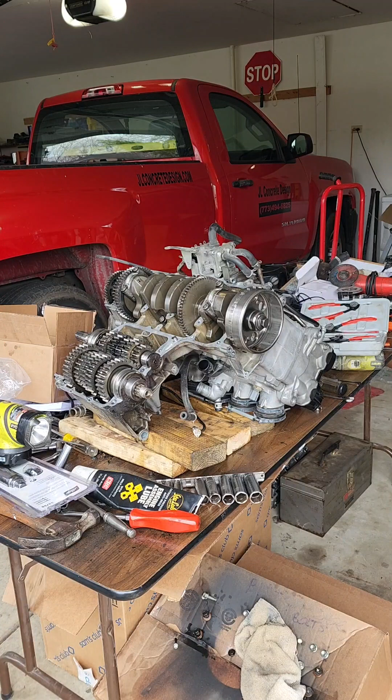I ordered some parts, main bearings. I didn't like the look of the main bearings. They were still usable, but since the engine's open, I just replaced them.

I had one very damaged shift fork. This is the second gear shift fork. See how badly worn it is.

My guess is a lot of these drag, track, whatever people reverse the shift order. They flip the shifter upside down so it's 1 up and 5 down, so they can bang those gears quicker. To me, that's exactly what it looks like.

This is the second gear shifter fork, so you're putting a lot of force as you're pushing down on that lever, and it's just eating away at this fork. The gears look good, but the fork was just worn out pretty badly.

This one fork was $105 new. I wouldn't trust buying a used one. It's a wearable item, so I just said to heck with it and bought a new one. So $105 there, and then here are all the main bearings.

They sell, I don't know why they do this, but they sell the main bearings in halves. So you got to buy 2 of these to get a whole main bearing, times 5, of course. So you need 10 of these.

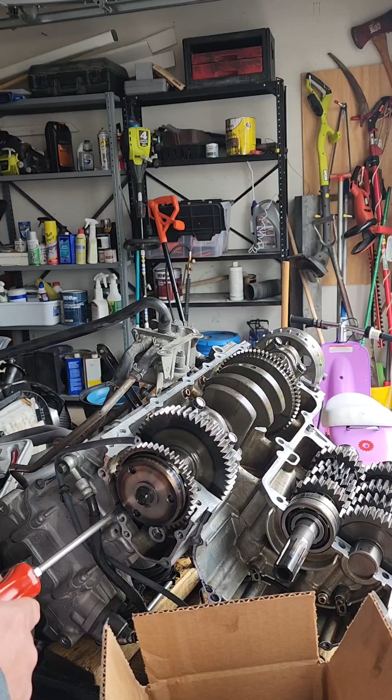So all I did to replace the main bearing on this first one was kind of pry up a little. Don't get aggressive, just pry up a little bit, push a little bit, and it'll tension the cam chain a little more so it lifts the main, and you can pick at this bearing and it'll slide right out.

I did remove the connecting rod caps on all 4 of them, loosened them up, so you can get a little more wiggle room out of the crank to replace the bearings easier. But I did it without removing any of the timing chain, and it's all in time, so that was pretty simple.

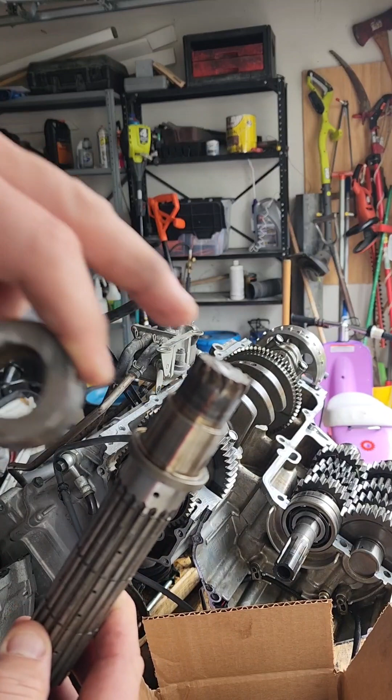And of course, the output shaft. This was the output shaft that was in it, you can see that - I'm off camera here. This is the output shaft that was in it, it literally sheared right off. This sits here, and then the bearing sits here.

It has to be pressed off. The rest of this is just gears, shims, and 3 snap rings, so you need a set of snap ring pliers, and that's it - that's your specialty tool there. 3 snap rings, and then the rest of the gears just literally pop off with the spacers.

You know, if you got a good memory, go for it. I don't, so I got the manual here to make sure where all the gears and spacers went.

You do need a press, though. You're not going to be able to get this off the bearing and this bushing without a press. Go pick up a Harbor Freight 12-ton, you can buy them cheap, $100. Or I'm using my Harbor Freight 20-ton, I think I paid $200 for it. So it's a very useful tool. Or you can just bring it to a shop and they'll press it off for you if you don't have a press.

But I'm curious to know what force did that, and I really didn't get an explanation from the owner. He just said his son drove the bike and he was popping wheelies and the chain broke, and I guess it got wedged into the case and just sheared the edge of it off because it got jammed and it couldn't spin anymore. But you know the story with sellers, they'll bullshit you till the end comes near. I never listened to them, so my guess is he probably overheated this a little bit, and that popping of the clutch, and you know the rest of the story there.

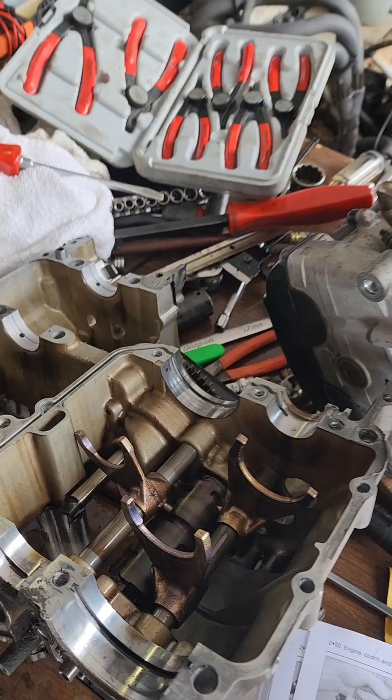Here is the fork I replaced. $107 later for one fork - these Hayabusa parts are not cheap. And then I think I found the output shaft locally, nice guy, I bought it on eBay and picked it up locally, and that was $75 just for the output shaft. Everybody wants $500 plus just for the whole transmission.

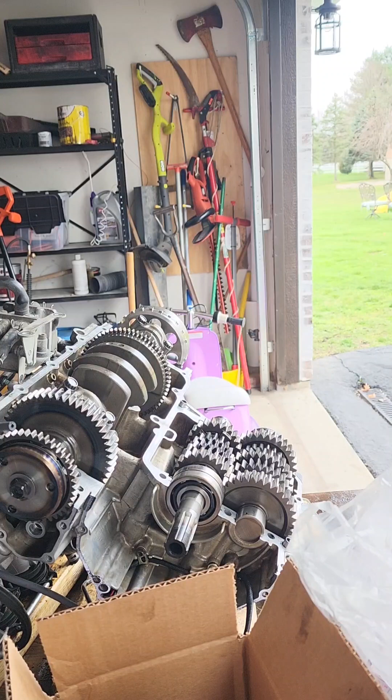So I managed to fix the transmission for $75 output shaft and the $105 or $107 fork. And then the $150 was just cheap insurance for the main bearings. So we're going to get ready to put this thing back together, and let's get it going here. I'm running out of time to get this thing on market to sell.

All right, next on the list is cleaning it up. I'm going to clean up everything here, the surface, and then I got to put the sealer, the RTV, on the mating surface here, and then I'm going to add more assembly lube to the mains and to the bearings in the transmission, because they've been sitting. I had to clean them with hot water, warm water, and I just WD-40'd them, which is literally like water anyway. So I want to make sure those don't start up dry.

Okay, let me look at the manual and see where this RTV is going here. I'll bore you with the searching, and then we'll get more in depth when we yank that other engine. I may take that other engine all the way apart, just so you guys can see what it looks like all apart. There's plenty of videos on Hayabusas taken apart, so I figured I have this spare motor, I'll go into it and see what's wrong with it, fix it, and sell it, because when this engine is in the Hayabusa and I sell the Hayabusa, I'm gonna have more money than it's actually worth in used condition. So the other motor, I'm gonna have to sell to make a profit on this bike, because I paid way too much. All right, sit tight while I do some search, and we'll see where the RTV needs to go.

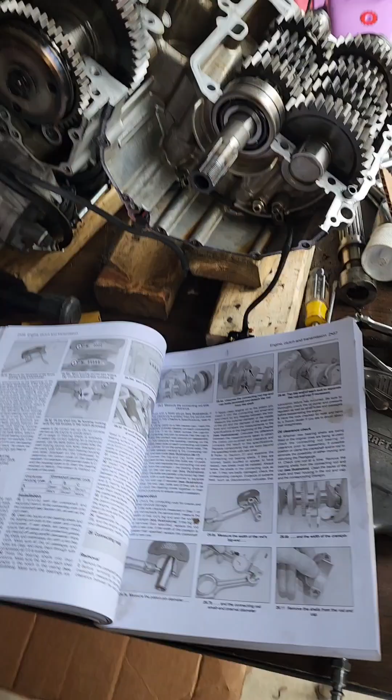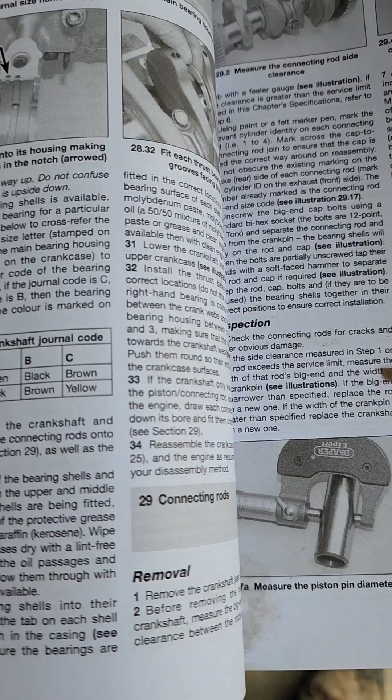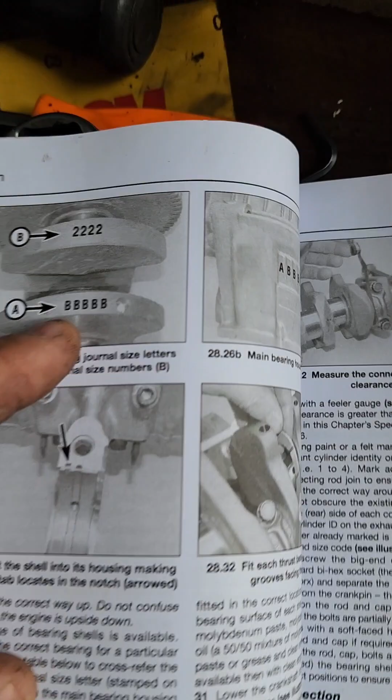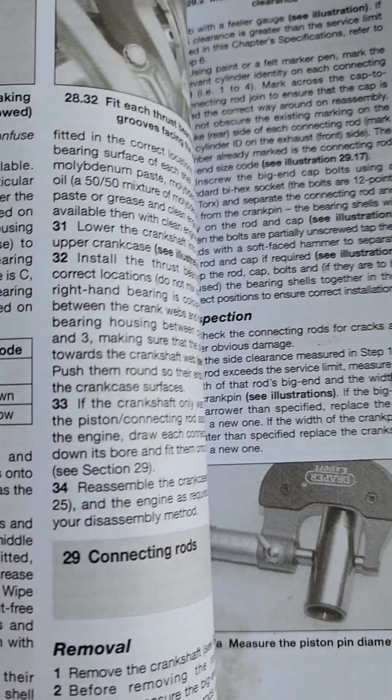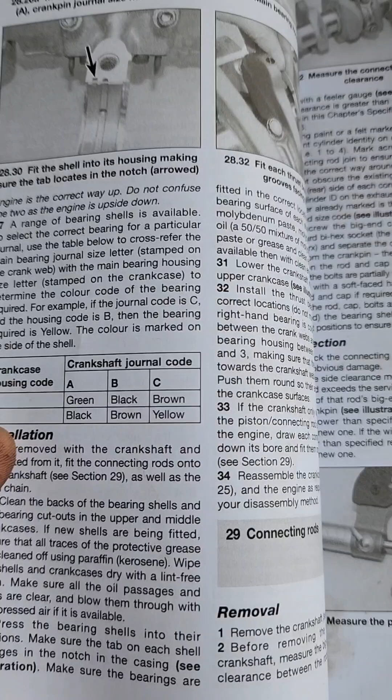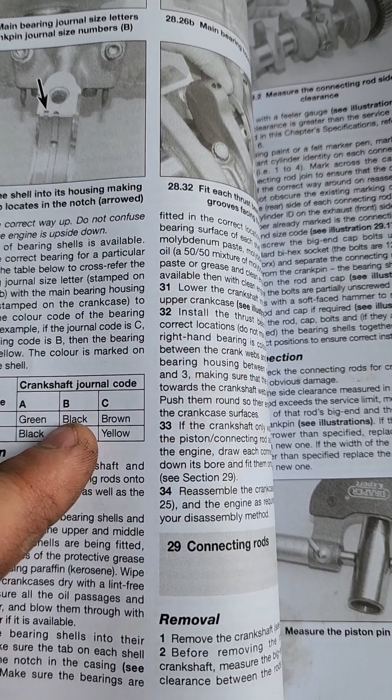So 4 A's and all B's, that was 4 black coated main bearings, and then I had the all B's and the 1B on the housing itself, the upper housing. Then one bearing I ordered was brown color coded. So I had 4 black and 1 brown, and that's how you determine your main bearings for that particular case.

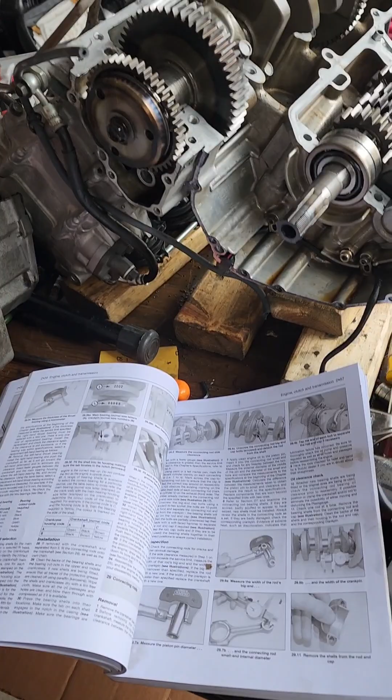Okay, I just thought I'd show that to you guys, and let me continue looking for the RTV side, where the RTV goes on this thing.

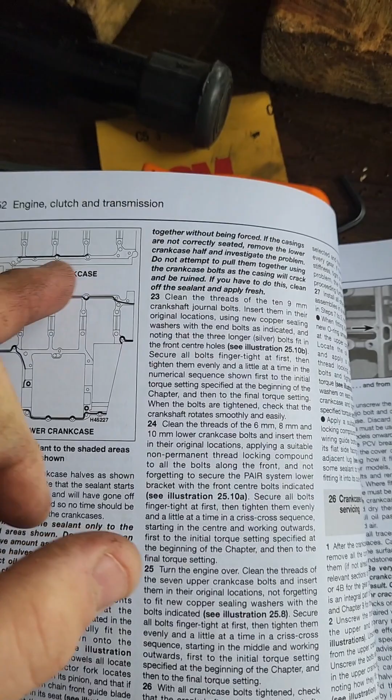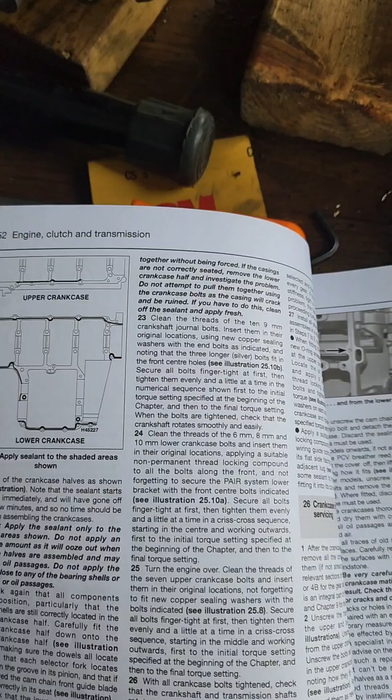All right, found the page. Looks like the upper crankcase gets a little RTV right there, and the lower crankcase gets it in most places. So let's get this done, and it also mentions making sure all the dowels are in the upper, so it doesn't get wedged in, or they don't drop.

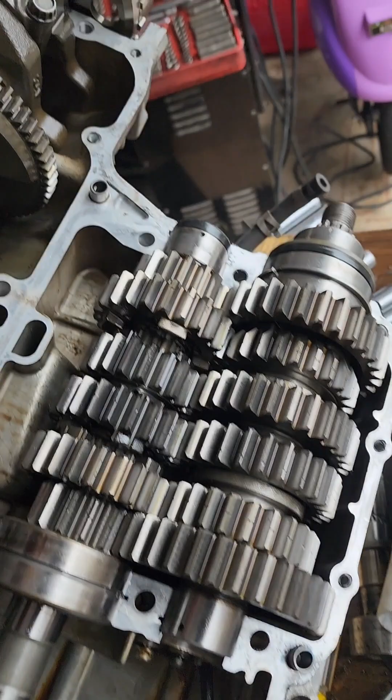All right, let's put the RTV on there. It took me a while to clean up the mating surfaces, a good 20-30 minutes to clean those up. So let's put the RTV. Looks like the upper crankcase from here to here, and then most of the lower crankcase on this side.

Let's get that done, and then we'll put the cases back together. All right, here we go. I'm gonna put the assembly lube on now.

Most importantly, we have to make sure the transmission is in neutral, because we have to do the little magic dance, putting the cover on and aligning the shift forks at the same time.

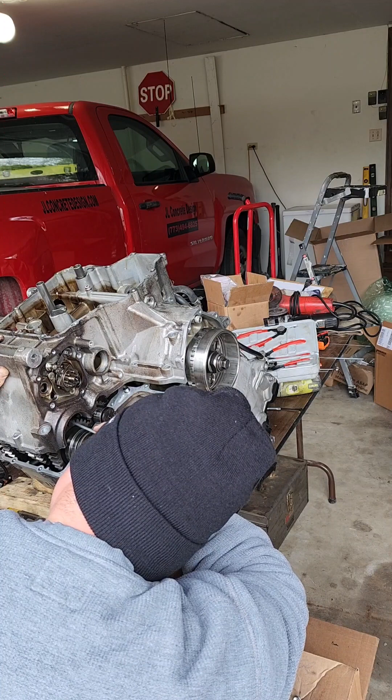I got the one shift fork, it's not cooperating. Of course, it's hard to get to.

Huh. Can't even get in there. Let's try.